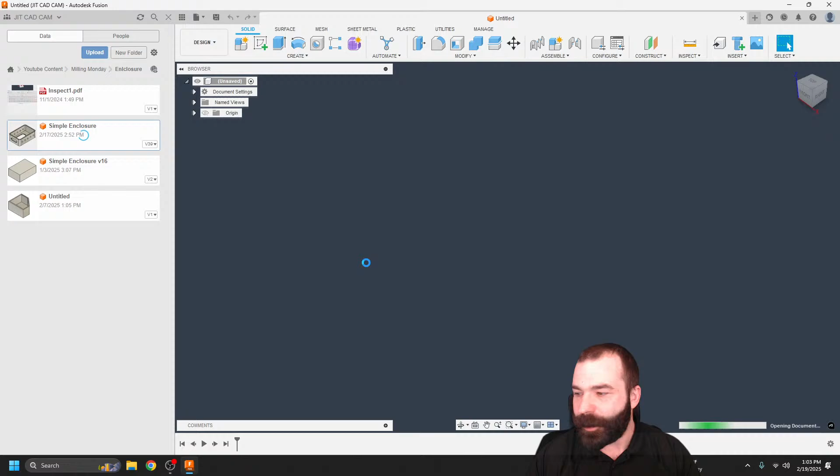Now, some of you already have played around with drawings as a whole. I am going to start with the basics by just grabbing a simple part here. And this is just nothing more than an individual part. And we're going to run through a couple of different workflows with drawings. I don't know how long this is going to take today. This might actually end up as quite a long video. But we're going to start out in the design workspace.

Now, the first step I would recommend is that you create your own drawing template, and I'm going to walk you through that at a very high level. Bear with me. It's been a while since I've had to do this, so a lot of things have changed over time, but we're going to go ahead and say new drawing template. We're going to set up our page size. In this case, I like the idea of a 8.5 by 11 standard printer paper. We're going to go landscape layout. Of course, if you believe in the non-bald eagle units, you could set that up here as well. So we're going to go ahead and hit OK.

And now, I've just noticed out of the corner of my eye, I need to figure out my lighting because the white coming off my screen is making me look way worse. I promise, guys, I don't look this bad. Maybe I can very quickly here throw on my tan filter. Let's see here. Am I a little better there? I'm a little more golden now.

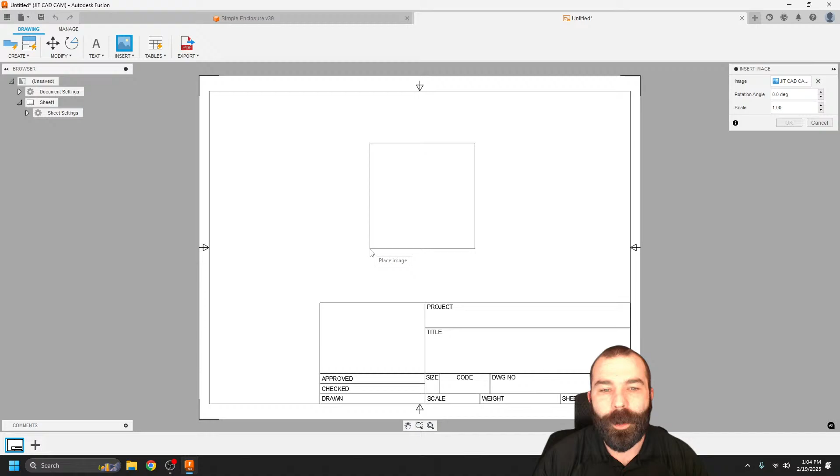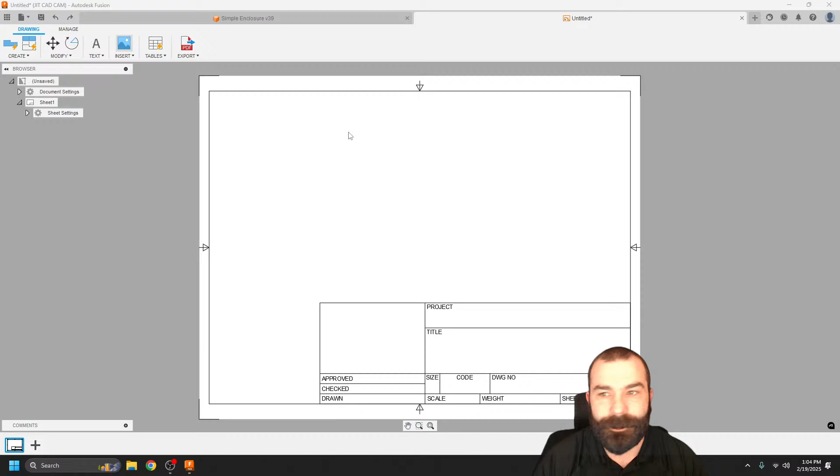There we go. So the idea here is we are not only just building the template. If you guys wanted to insert something like, in this case, I've actually already pulled it in, my logo for JIT CAD CAM, right? So if I wanted to put my own actual image in here, as you guys can see, I've inserted that image into the area. I'm going to actually back that up, and do that one more time here, because we need to get it a little closer to where I want it.

But the other side of this is we're going to have to scale this down in my case. So let's just go 0.6. Oh, still not quite enough. 0.5. Now, keep in mind the resolution size.

This is a 500 by 500 image. Things of that nature, you're going to have to control on your end, right? I just brought this in as a PNG file, nothing fancy. So a few other things you could always add in.

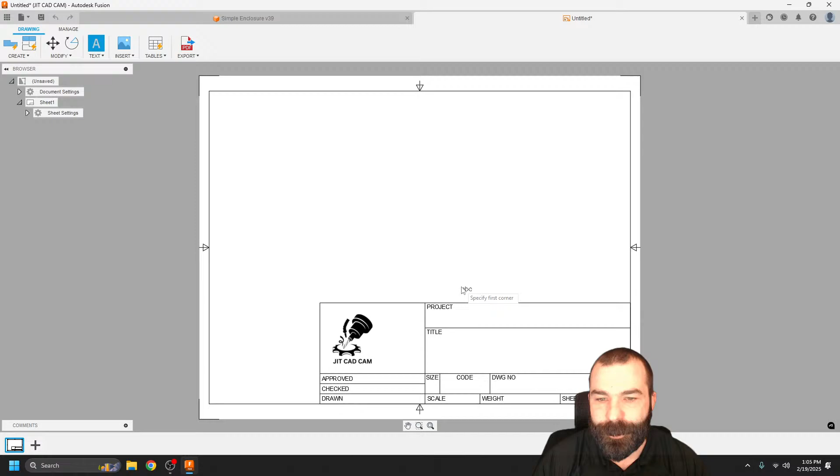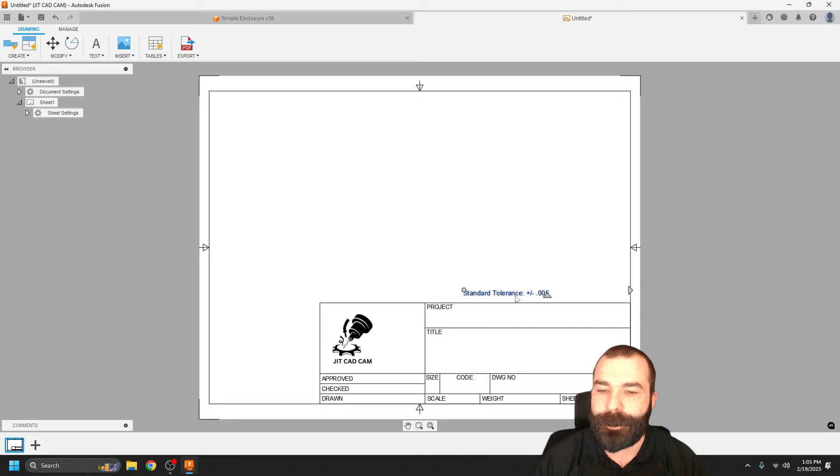Let's say, for example, you like the idea of, I always want to put in a standard tolerance. And in this case, we're just going to say it's usually plus or minus 5. Now, this is where I tell most people to skip any dimension on my part that's plus or minus 5, or maybe your standard dimension is plus or minus 3. And again, what we're doing is we're building out our template to use for later items, right?

So as you can see here, we've added an image. We can go ahead and edit this entire project area and your title block. Again, I just double clicked on it. We could obviously set anything and everything. We can even change out what's automatically being pulled. There's an entire manual that I forgot to put in the link of this video. I'll add it after the video on how to configure this and set it up.

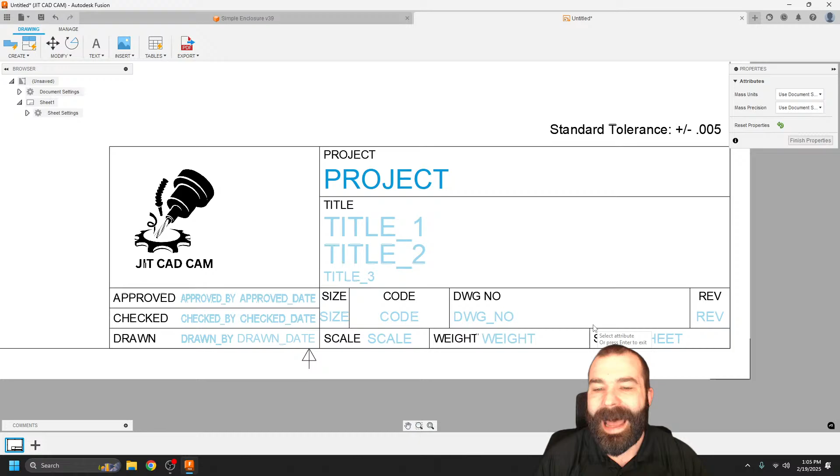So again, what we're next going to do is I am going to insert a table in this case. And what that table is going to be is basically the breakdown. And this is an automated table. And what this is going to do is automatically place our information as we need it. Again, you can go through, you can define this kind of like an Excel spreadsheet, pretty straightforward.

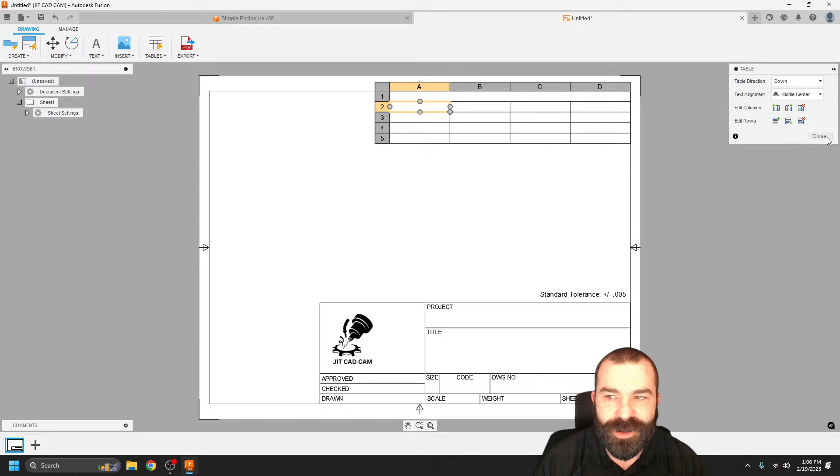Next, we can actually add our placeholders. So I can add a base placeholder. Now, what this is going to be at first is, again, with that common workflow, we're setting our defaults in our template level, right? So as you guys can see, I'm going to do the entire assembly. From that assembly, I would like that to be a shaded part. I can scale it automatically, or I can force my own scale.

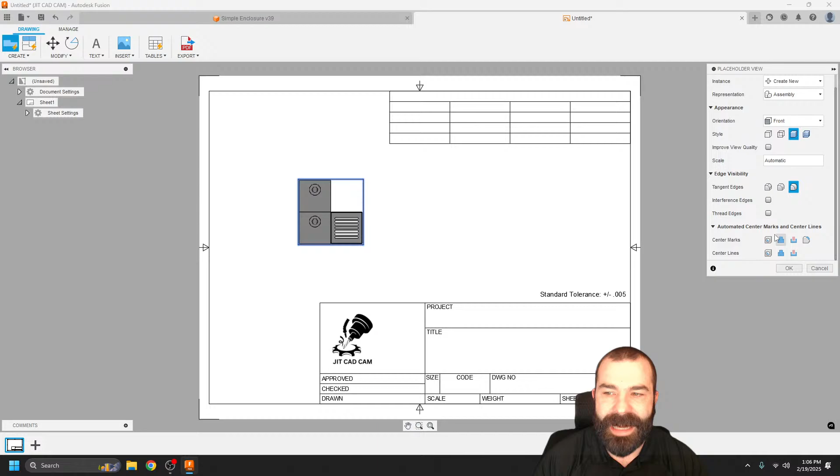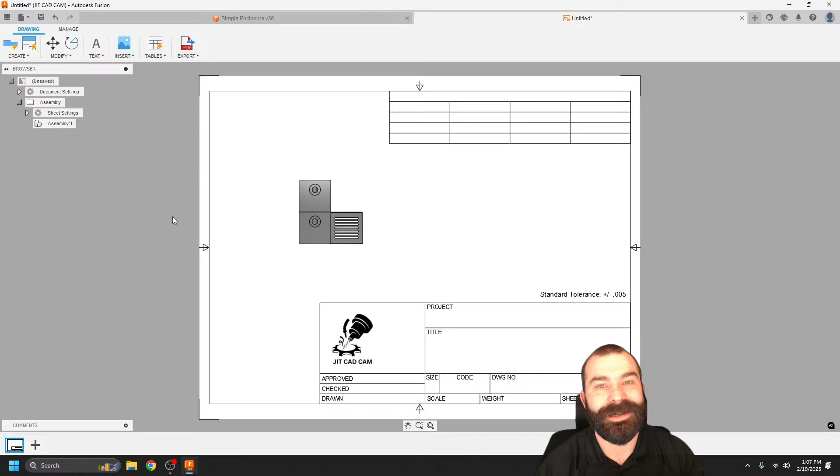Again, pretty common. We're not actually going to add anything automatically to any of our parts, because the idea is this is kind of like a title sheet or a cover letter to my drawing. So it's, again, a big image of my part. And then from there, we have our built out spreadsheet, which our data should come through automatically. Again, guys, it's been a hot minute since I've had to work deeply on this, but we're going to go ahead and add a second page. And you're going to see why when we get into certain things later.

Again, I'm going to put my placeholder. In this case, this might be the actual individual component. Now, if you haven't seen any of my content, this is where you guys are going to see a component is the Bible of everything. And that's why this is so important. Again, this is just going to be a shade. Actually, let's just do a visible edges only. And we are going to center mark, center line holes.

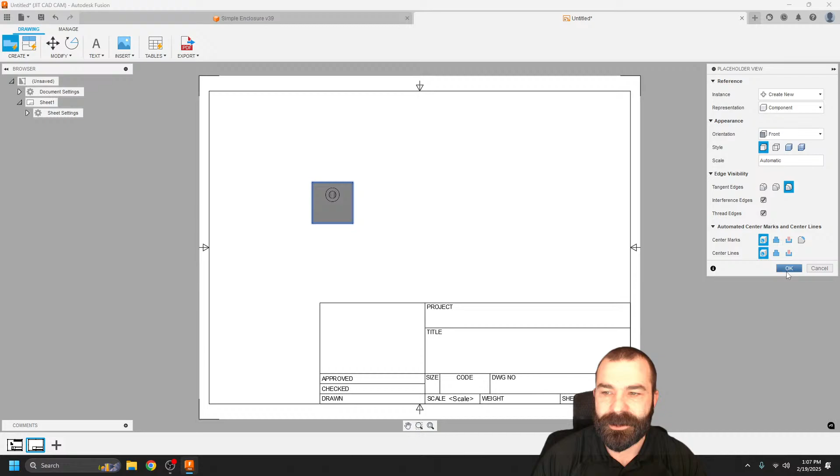And what you're going to see now is if I wanted to go ahead and click and drag to the right, again, I'm placing my different views of my part. And let's go ahead and get that up there. We're going to hit the green arrow. And now you can see it's automatically going to place my part as need be. Again, keep in mind, we went ahead and did our center marks on holes. We could turn off those center marks at any time. And you guys are seeing that update in real time with me toggling it on and off. Same thing happens with additional features as always.

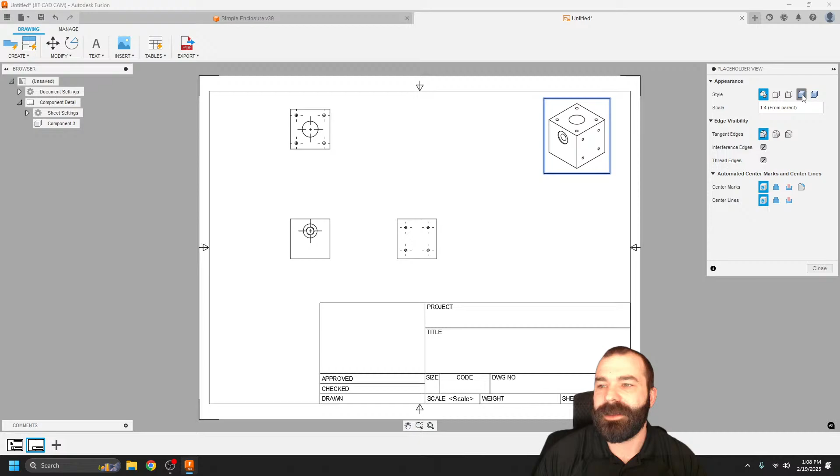Now, I prefer to make my part in the corner a lovely color shaded part. Again, I can individually change each item, but they're all being driven off more or less what is the parent product inside of the software, right?

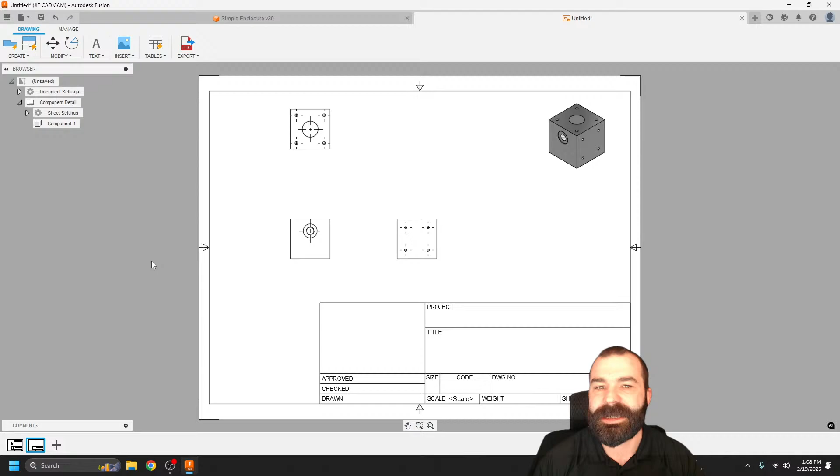Again, what I'm doing is, for those of you that have just jumped in, we're just building a template right now. I haven't even used a part. We don't need to make 100 placed parts, right? This is my default placement for each individual component. Obviously, if I wanted to go in and I had sheet metal parts, again, we would place one based on a folded component.

Maybe you want to do one based off of a flat component. Again, as you guys are seeing me do here, I'm just roughly placing these as placeholders for anything we're going to do after the fact. I don't think I have any sheet metal parts, but we'll go ahead and build a few out just in case. So now we have a couple of things placed.

Title block customization is relatively simple, but we're going to go ahead and save this. Now this is where I'm going to call this the JitCadCam title block. Or actually, we'll just call it drawing.

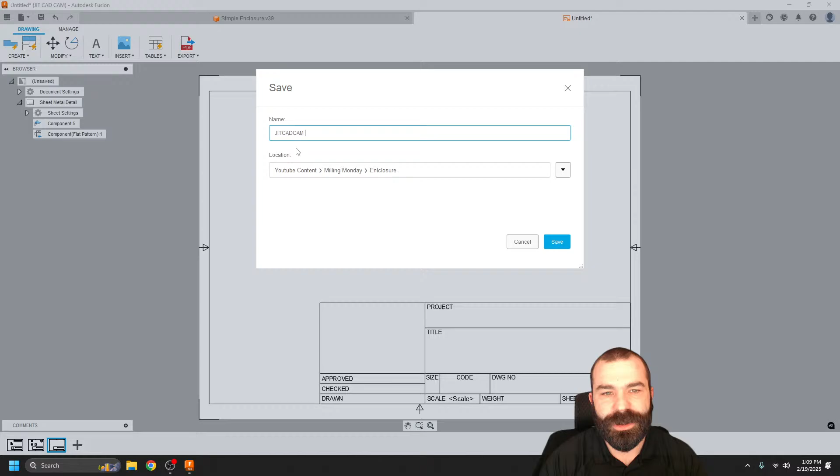So now that we've officially created our template drawing, Ryan, great to see you. I saw your comment earlier, buddy, about being ecstatic about this one.

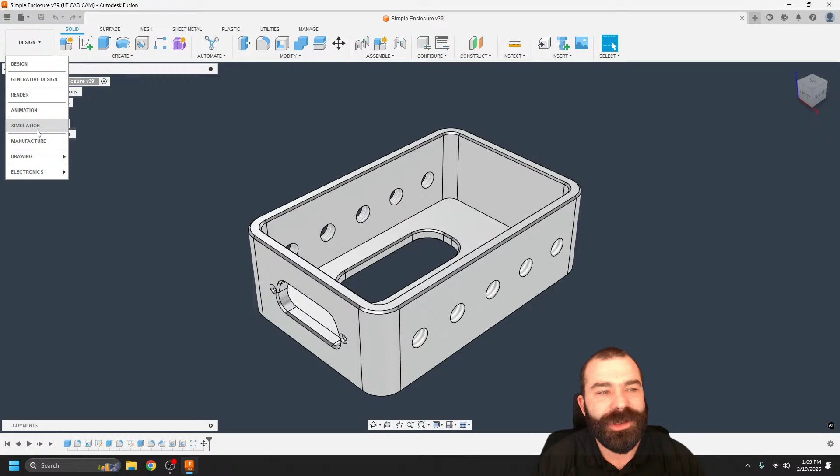The reason why building the template is so important, and that was a quick crash course. As you guys know, these videos are aimed to give you just enough to be dangerous to go play with this. Now if I actually wanted to create a drawing from this design, you'll notice we have a lot of different options for how we want to pick our stuff. I'm going to do this manually the first time through, and the second time we're going to do it automatically. This is the only exception to the rule why I tell people on my drawings: I machine from the model, the drawing comes from the model. The only information I care about on this model is really pertinent information like hole spec data and any feature that's critical, and you guys will see this.

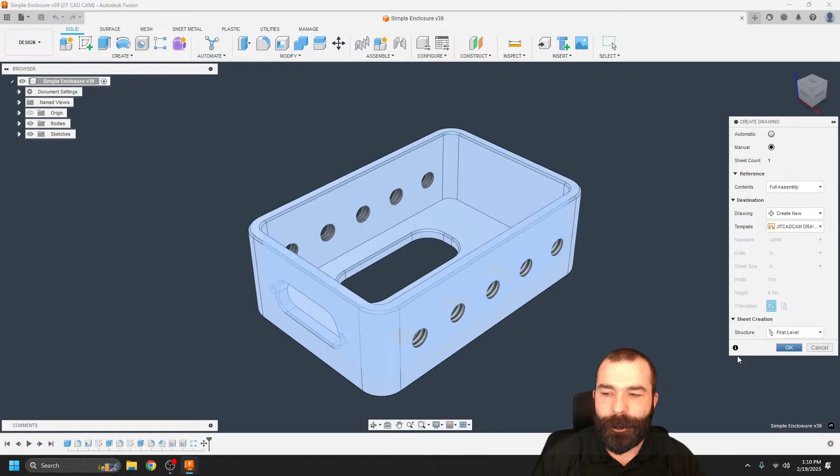So what we're going to do is go down and say from our template file. You'll notice it's locked us out on everything. Again, we have the ability to say first level only, all levels. This is not an assembly file, this is only a part file. So we're only going to do one part the first time through, and then we're going to pull up an assembly and have a little bit more fun with it.

But as we talked about, remember when we created our template, we created several different views down here, or several different sheets. The thing is, since it's only one component, it has placed that one component and automatically laid out all of my features here inside of Fusion.

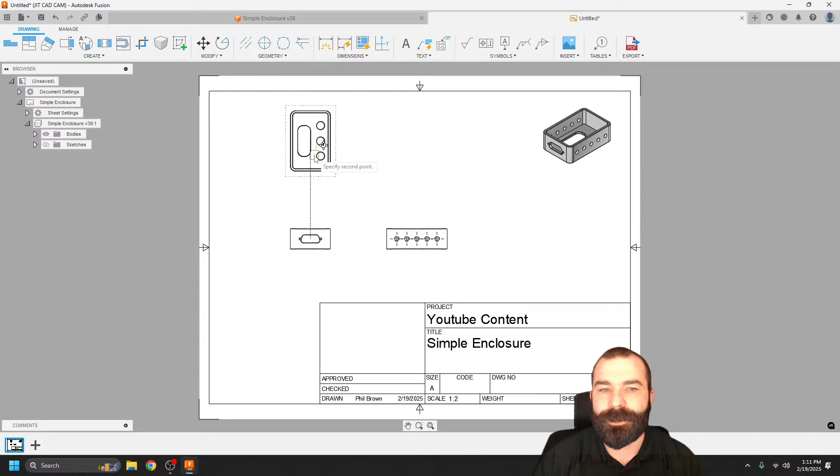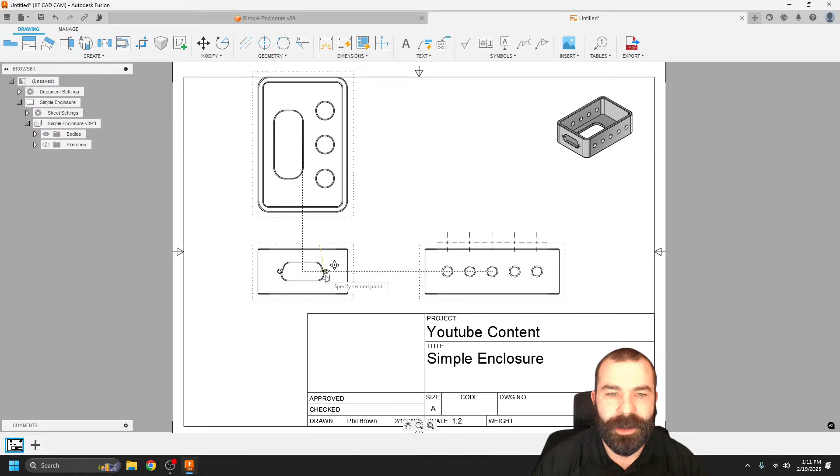So if I wanted to move it around, of course I have full range over moving things around. If I wanted to, for example, not have center marks on this, you can see we can go through and turn things on, turn things off. Maybe I want to change my scale for this particular part, and I'll change my scale up here at the top, so 1 out of 2, nice and pretty. Again, we could drag things apart. I can modify the drawing even after the template has done its thing. So this is super handy at the end of the day.

Now that we've done our drawing, this is where we can start to do a lot more things with this. The most basic thing a lot of people are going to want to do is dimension your drawing. So I'm going to skip all the way over here to the right, and what I'm going to aim for is we are going to start by setting up our dimensions.

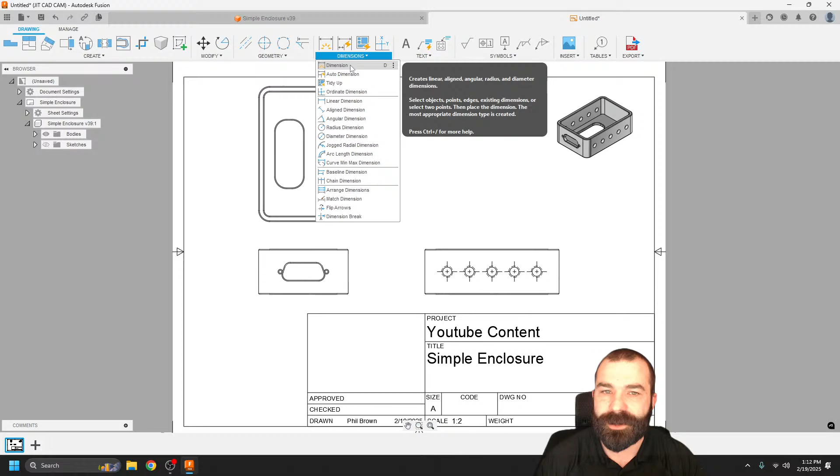Now you need to keep in mind there's dimensioning everything from point to point, here, there, and everywhere. If you're somebody that does a bit more GD&T critical stuff, we may want to create our datum and work from a datum. So what I could do is say ordinate dimension in this case, and let's say that's going to come right off this corner. Now I have my zero point. So maybe the next thing I want to measure inside of this part is this flat right here. I'm picking that flat and dragging it out to the side. Again, we can just continue on with this process.

But one thing you're going to notice is all of these have been placed in random positions, and they're not really aligned to each other, right?

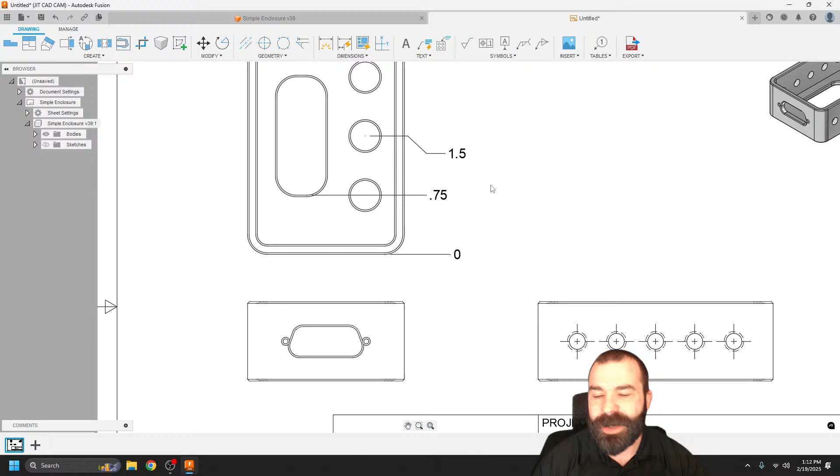Now there's a trick to this. Once I placed my first dimension, let's go ahead and delete these two and see if it still works. If I go back and use the Smart Dimension tool, I'm going to pick that first line. Then if I drag up and pick anything along the way, notice it's automatically aligning everything for me based on those reference points.

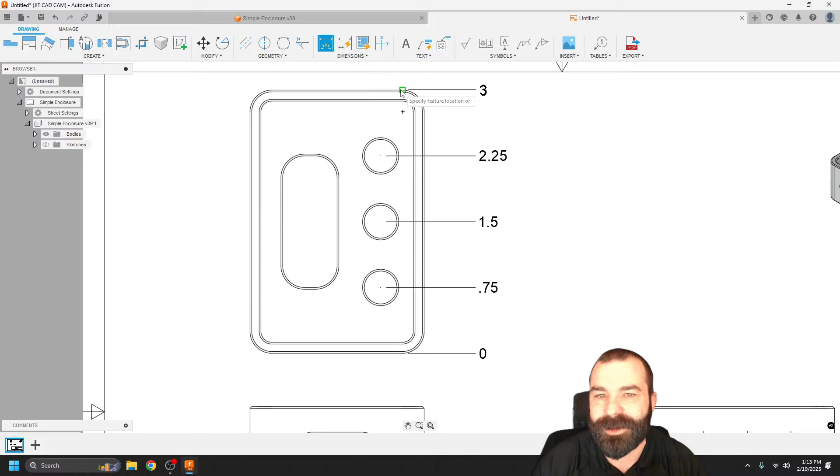So even when I get in here and start placing stuff in weirder areas, you still have complete range and functionality of placing things where you need on your drawing. Oh, I went ahead and hit delete there. Again, we just pull that first ordinate dimension. Let's just say we're going to place these 3 holes.

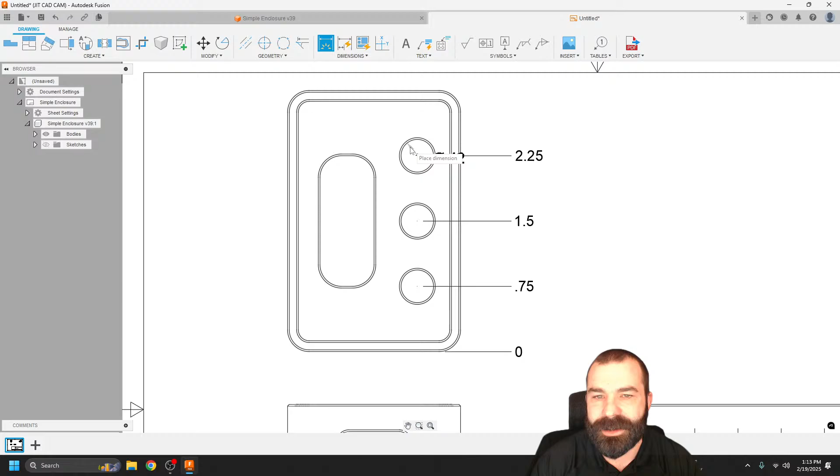Now the Smart Dimensioning tool is basically the easiest way to do anything inside the software. If I wanted to use the Dimension tool on this hole right here, I can go ahead and grab that edge, or if I misplaced it, I have the ability to delete and pick again, since we actually want that inner bore.

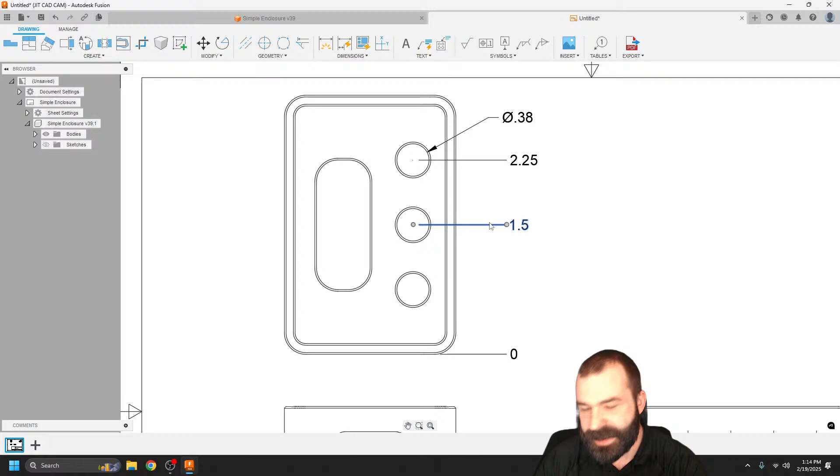Now, from this, if I needed - like I've said to people - this is how I dimension a part. If I'm going to make this part on the floor and my customer hasn't provided a drawing, this is my take on it. I would only care about a few things. One would be the outside dimensions of my part so I know my stock size to order for manufacturing.

And we're going to get these on here pretty quick. So there's my outside dimensions. And then lastly, we need a thickness.

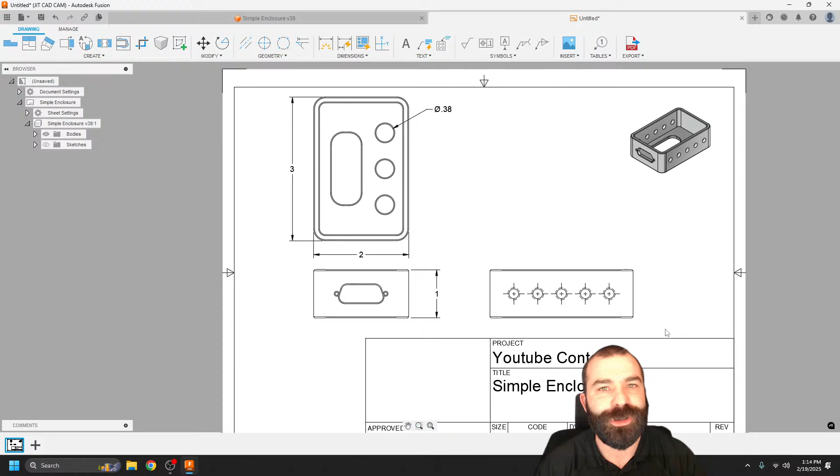Now, where you place these of course always comes down to you guys, but what I'm looking for is rough dimensions. Notice we didn't add text in our template to show us a ±5 or ±3 callout - that's a template controlled thing. We only did it on that cover sheet, not here at the individual component level.

But if I wanted this hole, for example, to have a specific tolerance, I could double click on that, and that allows me to decide how wild I want to get with it. So I want ±3 places, maybe go to 4 places if it's there, and maybe add all my trailing zeros. So even though this is only a 3/8 hole, we're going to call it out now as 4 decimal places.

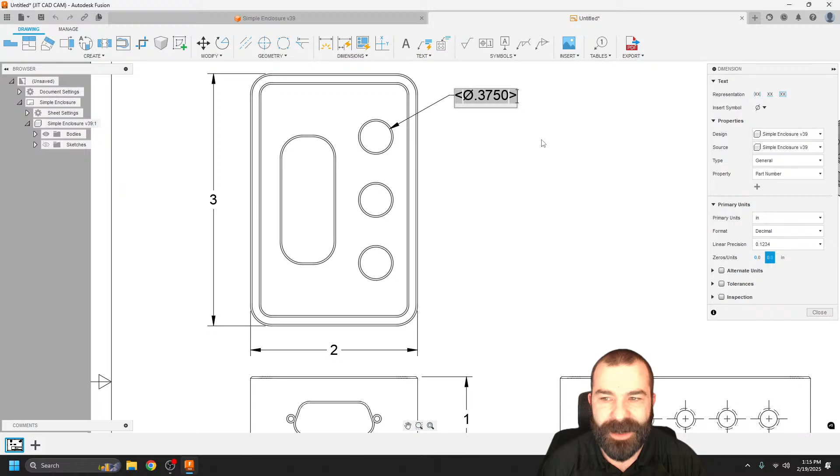I think a lot of you've seen on your drawing that it'll say 4 decimal places, there's ±5/10 or something like that. So if we were to put that down on our template when we created it, it would automatically be there for what we're doing.

Now if I want to get even fancier, I could throw in additional tolerancing - maybe we've all seen this, right? This is the stuff that drives me mad. A lot of us have talked about plus or minus from a number, but some of us have seen 2-dimensional tolerancing, greater or smaller than our part.

Nominally when we draw that hole, in this case we need to either be nominal size, and then I could do something like +10, -0 in this case. When you get in here and start to change the number of placeholders, my tolerancing is updating as well.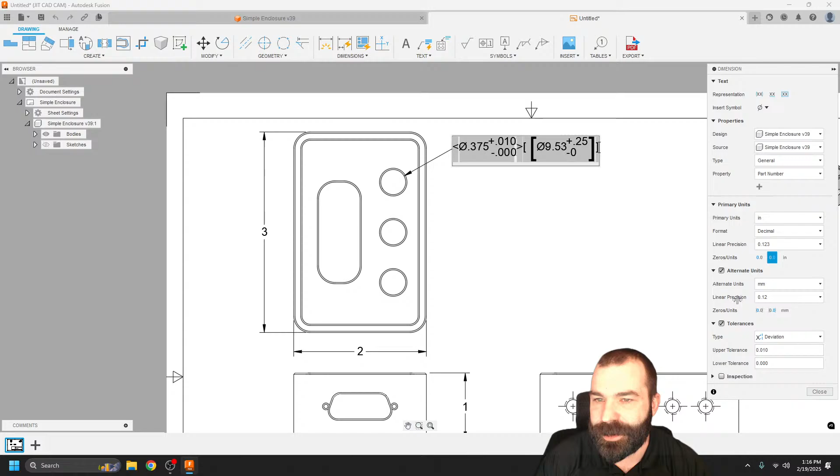So if you're one of those people that believe in using another increment altogether and you want to show both on your same file, maybe I also want to put millimeters into play, 3 decimal places for millimeters. We want to make sure we have our trailing zeros once again. Nothing right or wrong here - you guys have the ability to control each and every one of these.

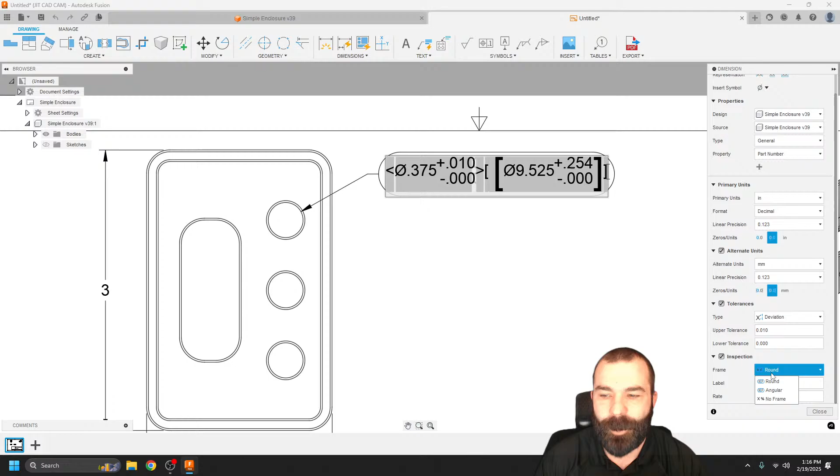And you can even set up things like inspection callouts as well. A lot of different things when you're basing your information on your drawing - this is important to me.

If I needed that to be a precise hole, I need to tell the operator that this is a precise hole, right? The whole game plan here is to communicate the data outside of, in my opinion, the standard to the drawing. So here we have a +10, -0 situation, here it is in millimeters. We've bubble outlined it in this case specifically so that the guy running the machine, or if you're going to place this in the parts bin, has the ability to see this.

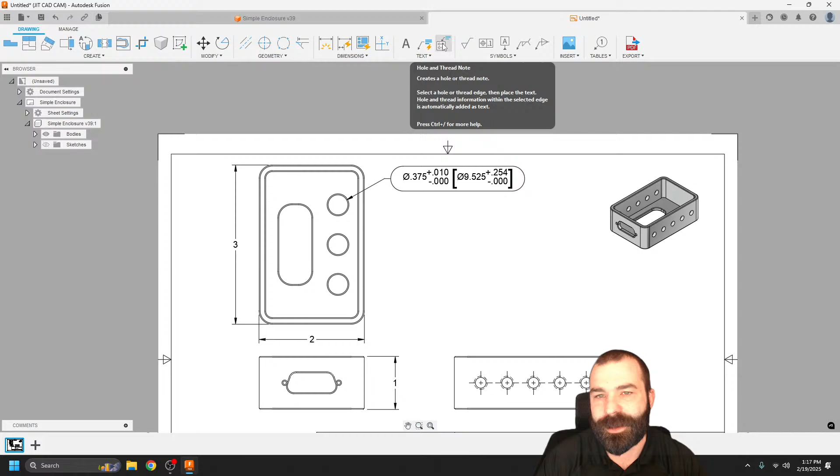Now, some of the other tools you'll start to see here, we can actually call out holes and thread notes. So if I click the automatic note function, and pick this hole here and drag outwards, you'll notice that because at my model level we've made these threaded holes, when I use that smart note feature, it's automatically called out all the information about my hole for me.

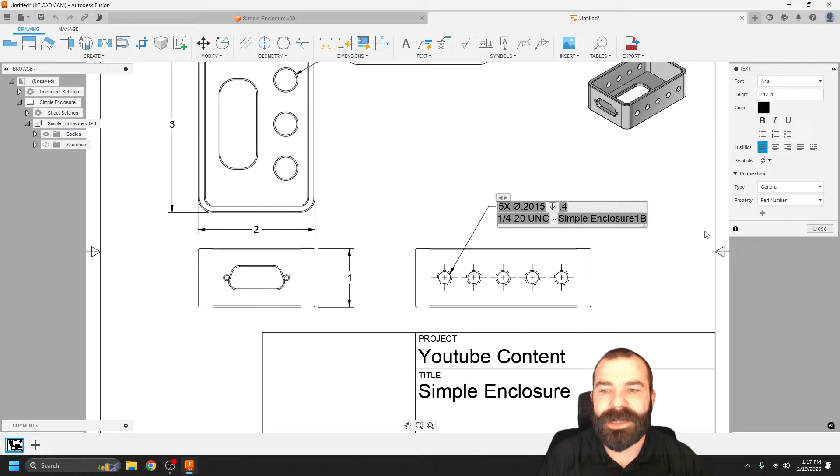So this is something super handy at the end of the day. You can go through and add anything and everything that you need. As you can see, we can actually insert the feature properties. Again, it's all up to you guys what you want to do to make this as great or as little as you want.

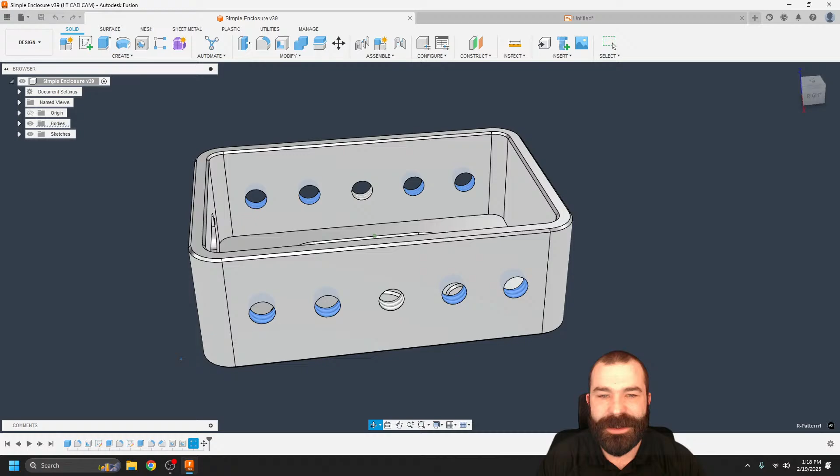Now, one thing to keep in mind, it's calling out 5 times on the one side of my part, but we do have 2 sides of this part. So depending on how your feature tree was built, I want to double check my feature tree here real quick. Looks like we did do some patterning here, but we created one hole here and one hole here, and then we've patterned everything out. So sometimes your feature tree makes all the difference when it comes down to doing your drawing side of things.

So it should be referencing 10, however it's not in this case because of how I created all of those holes. And as you guys will start to find out, this is why there's things like the hole tool, placing your holes based on point locations, to make your workflow much cleaner here in the drawings workspace.

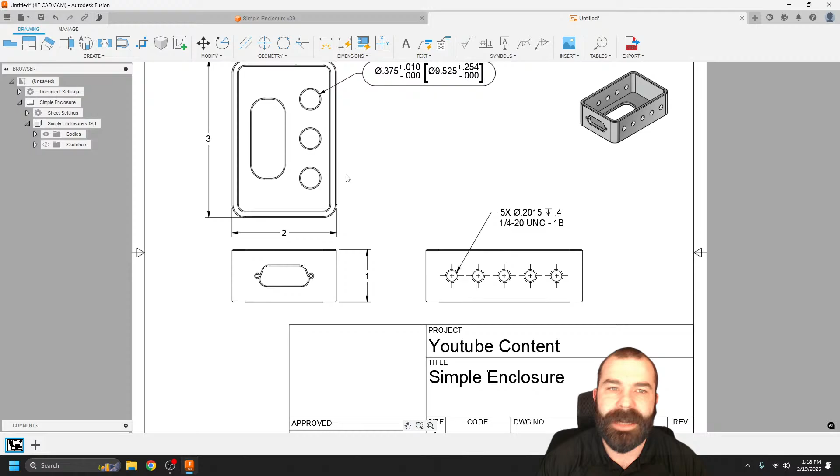So a few other things we might want to add in. You saw I went ahead and turned off things like hole centers. We can actually go back to our geometry side. We could drop a hole center mark based on a feature if you wanted to access that, kind of as a datum situation. If we went in and said let's create an ordinate dimension based on certain features, I could set that based on this line right here. Oh, we're getting a little laggy here.

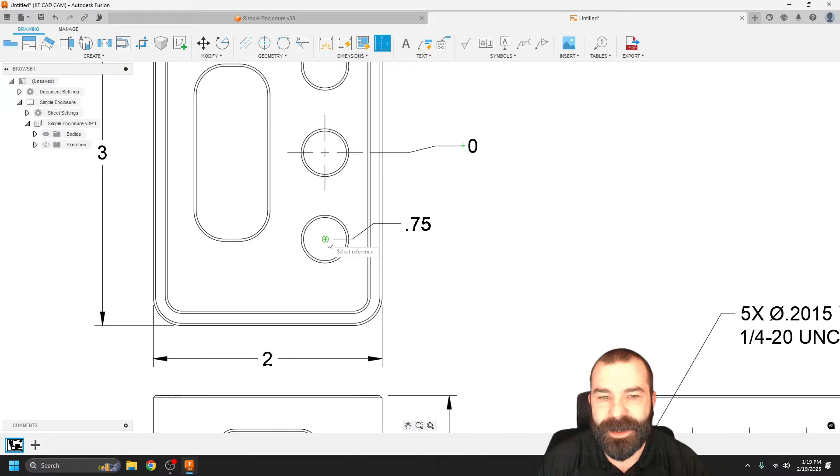So there is now my 0. And then if I go down here, and then if I go back up here, what you're noticing again is we're setting something almost like a datum and working off of that datum.

So a cool other couple of features I think a lot of people don't realize is the ability to actually insert tables. We can use an automated table, and what this automated table is going to allow me to do is, one, clutter up my drawing a ton. But again, we can drag and drop stuff anywhere we need it.

So let's go ahead and get this out of the way as well. It's going to be a little difficult today, so we might actually just delete this so you guys... oh, nope, we got to grab the little node in the middle. We're going to get this. Let's just put it down here.

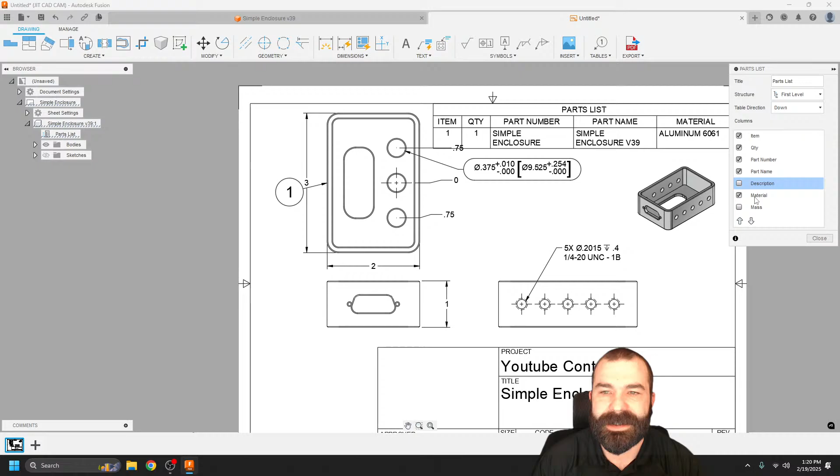There we go. Now, cool things you can do here: calling out your part numbers, part names, your material itself. Autodesk has made this very easy to add just about any information that you want against this part, so that it is easier for your operators or whoever's going to use this to control it, right? So we're going to go ahead and get this dimension out of the way so I don't lose my mind. Everything's starting to get cluttered here, so we may need to make a late decision about, hey, you know what, I need this to be smaller.

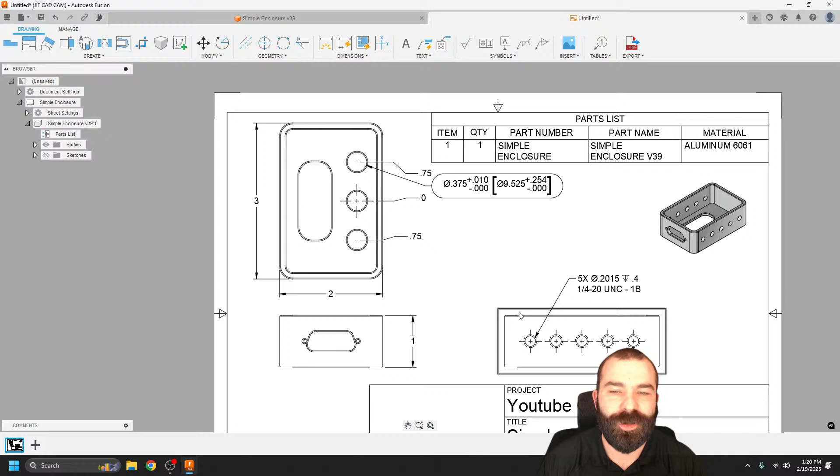I need this to be bigger. So again, you have your bubble callouts. We've called that out based on creating an actual title block. Again, very easy to do. So the next thing I'm going to do is I'm actually going to scale this down because we're going to look at doing a few other things here.

So what I'm going to do now is, again, we're going to move this over, still having to move our parent part in order to get our child parts to move around. But this is where, just like everything else in Fusion, when we first came in here, I've kind of jumped over the workflow where we got straight to dimensioning, because most people want to know, how do I just dimension out my part? How do I add the notes for the hole features for my guys, things like that.

But normally what we want to do is we usually want to create your base view. We've already placed our base view and our projected views. So if I wanted to add another projected view at any time, again, we can grab that projected view off any one of our placed areas. Again, you're seeing an isometric view because I went downwards at kind of like that 7, 8 o'clock position, right? Now with that, again, it's just a projected view from the view I pulled, isometric bottom of my part.

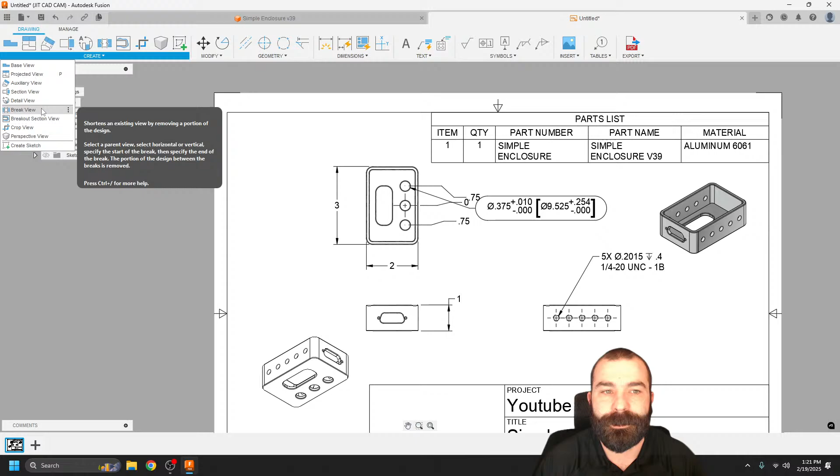We can do a lot more things, as well as getting into your break view type stuff. If you have a very long part, we can actually shrink it down. So if you're running shafts, break view will allow you to break that drawing and scoot it much closer together. A lot of people love the section view as well if you're doing turning parts.

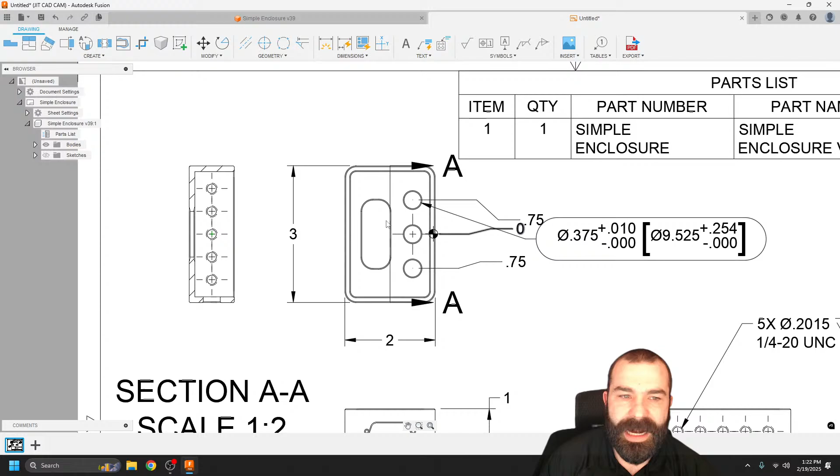Now, section view is always fun because, as you're going to see here, I said section view based on this enclosure. And what I'm doing is I'm placing my first point, my second point. And now what that allows me to do is give me a section view of my part. Again, visible edges only. And as you can see, we're now looking at a hashed profile of the inside cavity of our electronics enclosure. Again, a lot of this stuff is going to snap to locations the same as your sketching does. So as you saw there with that section view, I was able to snap directly to points on my part. Again, I could drag this up now at any time.

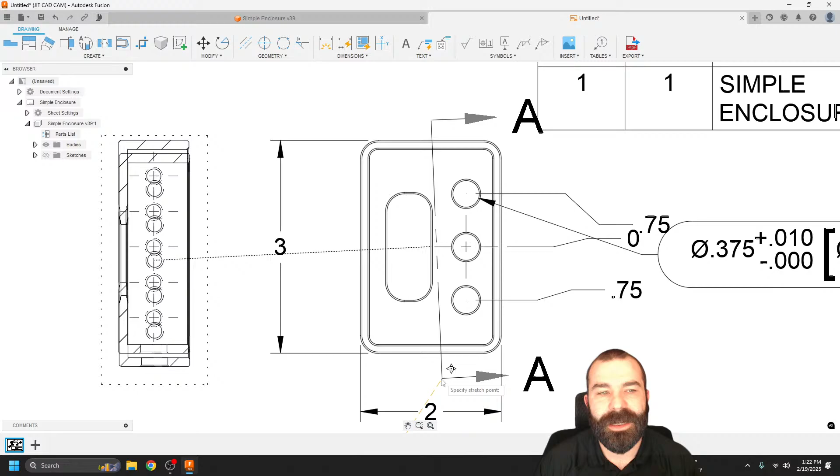We could also rearrange these to get them a little closer. Depending on where you put them will also change your section view. As you guys can see, if we're not at the true 12 o'clock position, 9 o'clock position, everything and anything is going to come through automatically.

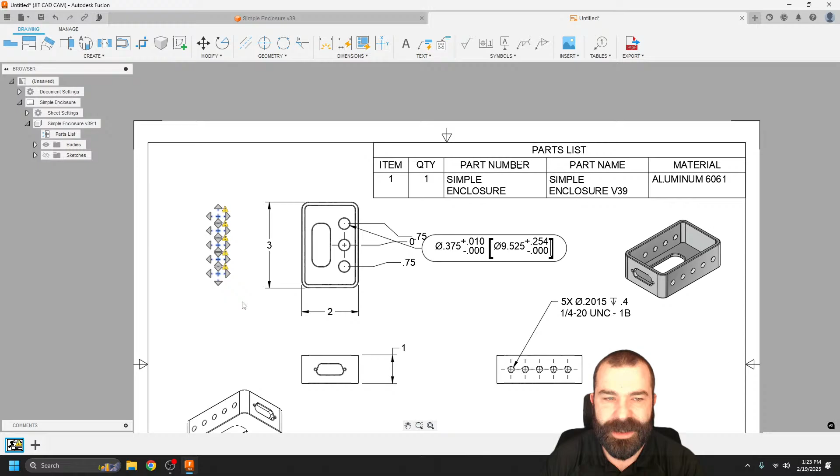So again, as you can see, I could do a lot in a manual process, but now for my guys on the floor or whoever's going to run this part, if I was still using a very traditional manual workflow, as you guys are seeing here, I would only give them the bare minimum data that they really need to be able to utilize and create this part, right? As you saw, we called out our critical hole dimension. We really don't need any of this other stuff. My shipping and ordering guy needs rough stock size for ordering material. And we kind of have that all placed here, right? We also have our hole tolerance callout.

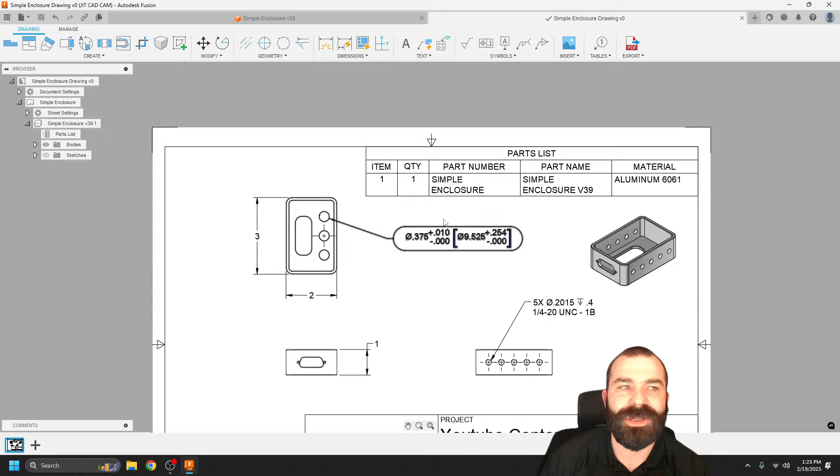So I could save this drawing. The nice thing about that is it's going to auto place it inside of our project area. And as you guys may or may not know, and you may have seen this, if I need to actually take this simple enclosure and reuse it, if I go in and I say copy this, it's going to give me the option to include my drawing with it.

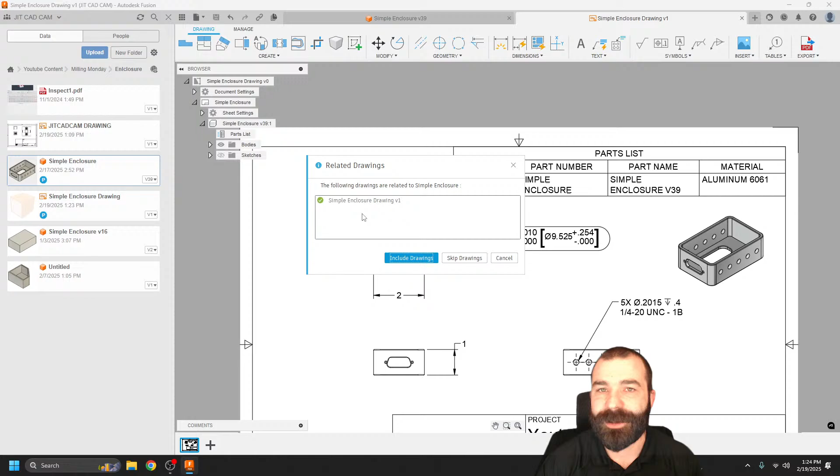Why is that important? Well, if you were actually going to create a drawing for a jig or a fixture or a vise setup for your machine, the value here is, if you're using parameters or the actual configurations page, as a lot of people are doing now, we can actually have that drawing also generated to go with it every time you copy it over to your part file for manufacturing. So again, the nice thing is because the drawing is tied to the model, at any time if this model was to change, let's get back to my base features.

You guys are going to see me completely break this thing probably. And we're going to go 3x6. Again, made that part much larger. Maybe we're going to increase our pattern out a little bit further.

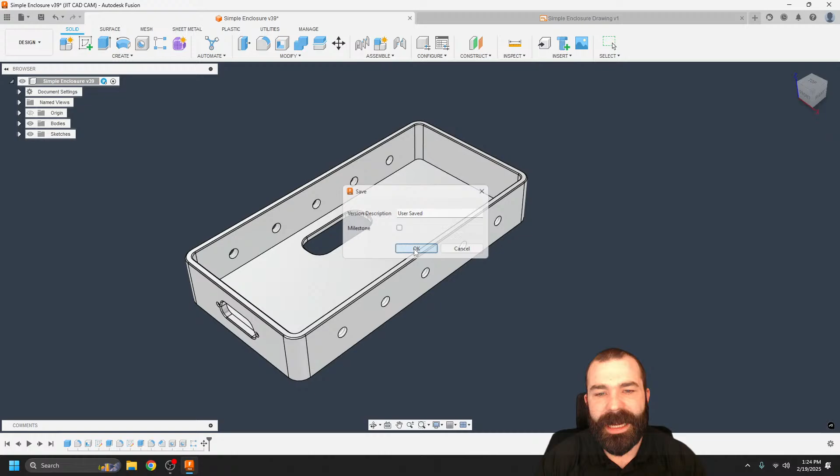As soon as I hit save here, in the typical fashion of things being linked inside of Fusion, my drawing now tells me, hey, my simple enclosure needs to be updated. So I'm going to go ahead and hit that update button. It brought in that new size. And you guys see, of course, my dimensions have all updated accordingly. Anything that I had placed or called out.

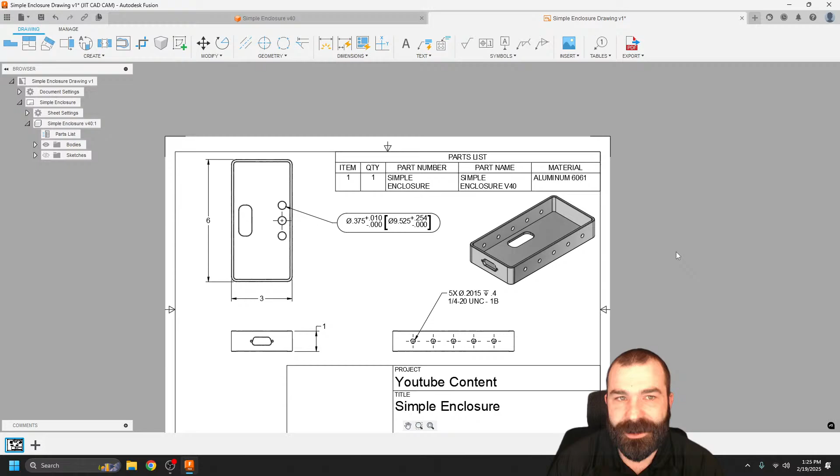Now, I do need to do a little rearranging to get it reorganized in here, but let's go ahead and shift gears here real quick. Let's go back, and I'm going to save this just so I have it, but this time let's create our drawing from the side of doing things with the automatic drawing dimensioning system. So what we're going to do again is we're going to use my same exact template. We're going to go ahead and hit OK, and we're going to let Fusion do its thing.

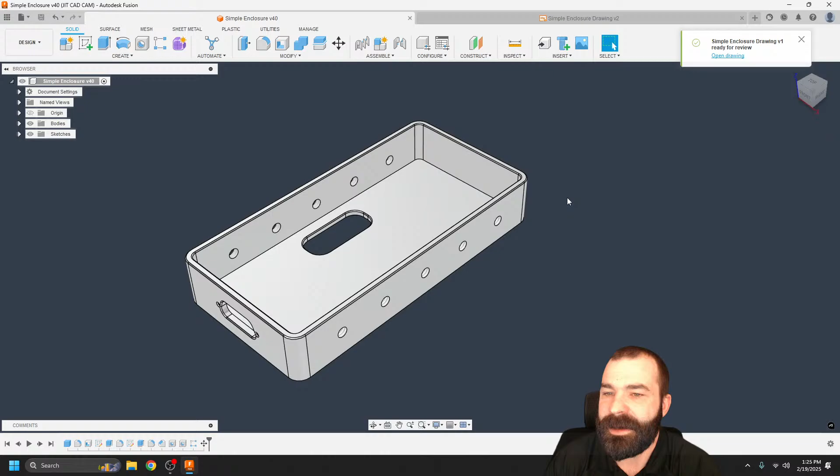So it actually started itself for creating that enclosure drawing. And what you're seeing now is it's very snappy, given this is a pretty simple thing that we've done. So we're going to go ahead and open this up and take a look at what it's done for us. Now, if you've ever used anything from simulation to generative design inside of Autodesk, again, my template has placed my parts, so I may need to move them around. But first, I need to actually edit the auto dimensioning.

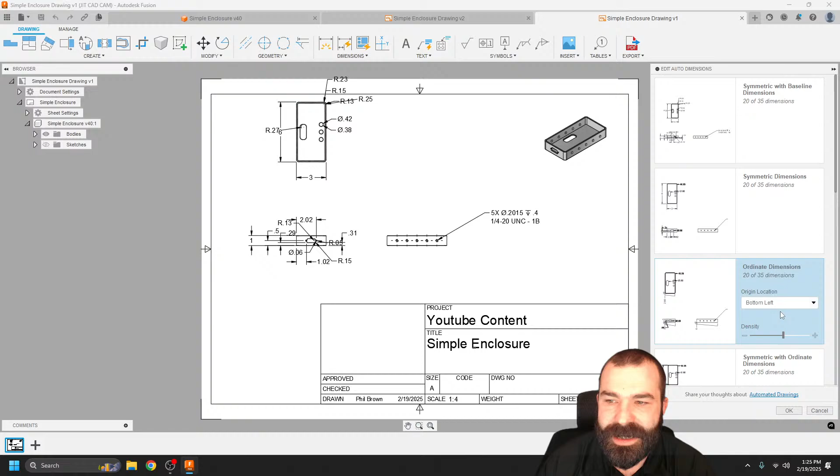So as you guys can see, there's a lot of different ways for you to call this out. Again, we can simply jump from the baseline dimension to ordinate dimension. I can increase the density. I can decrease it. Again, what that allows you to do is how many drawing dimensions do you really want to add here, right? Do I want to call out every single little thing in every single area? You guys are seeing all of my fillets are even being called out on this part.

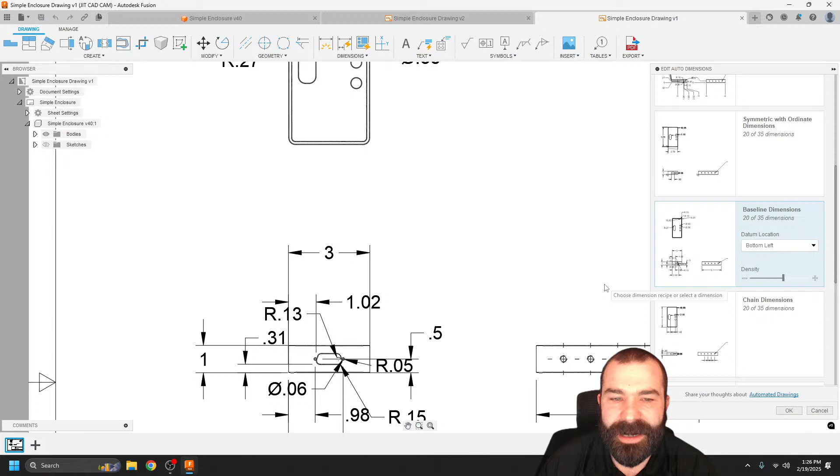So again, this is super neat and super quick for the drawing side of things to efficiently place anything and everything that you guys have, again, for the ability of manufacturing, right? That's the end goal each and every time. Now that we've placed everything, of course, we can go back, we can move things around, get them where we want them, move our dimensioning to wherever we need to call it out and place it, right?

So a few things that are still missing, I might have to go back and add my critical dimensioning. Again, we can actually change our default settings inside of Fusion 360 as we're going as well. So we have everything from a sheet setting, our title block can be swapped out, our fonts, again, full customization inside of Fusion.

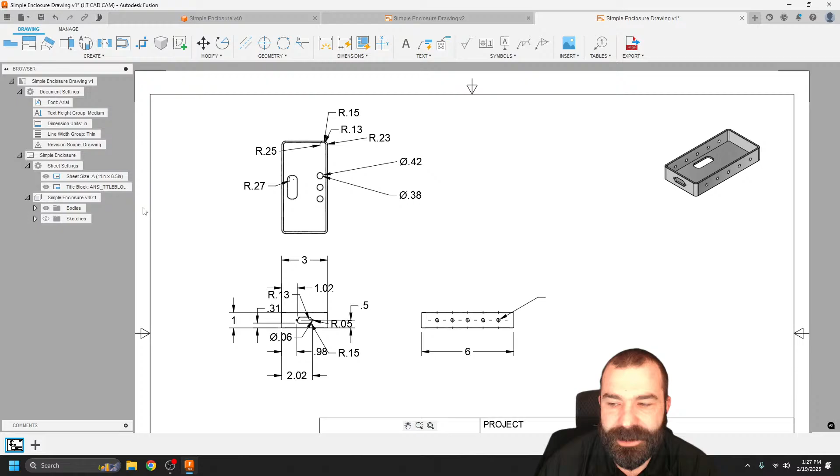So now to see our template work a little bit better here, I'm going to go ahead and pivot. We're going to go ahead and open up a part that is actually more of an assembly, right? So if I was to take this Kurt vise, this is just a blank jig and fixture. I haven't placed a part or anything in here, but it is structured with components. And one additional thing, as you guys are seeing, is we also have the animation side of things.

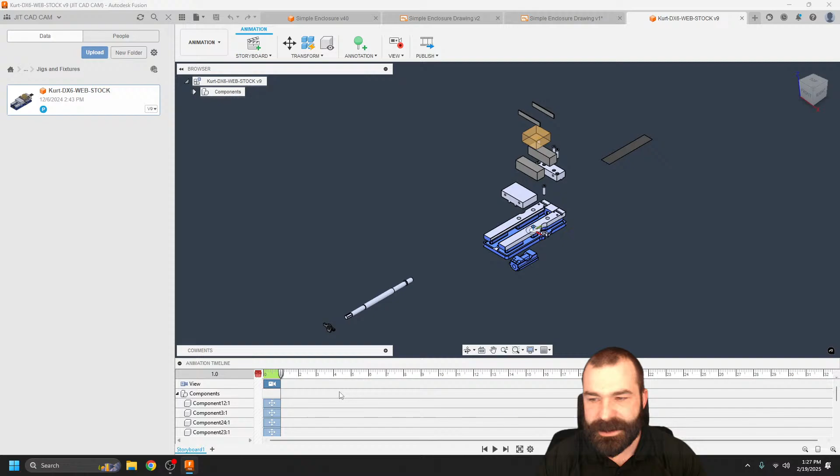I haven't made any videos on animation. There hasn't been a ton added to it. But if you guys wanted to, I'm going to show you how to do this real quick. Let's go ahead and delete everything out of here real fast. So if you wanted to go through and create an exploded view of something, right? So as you guys can see here, here is my timeline at the bottom.

I could go in and I could do automatic explode all levels. Of course, we got to pick our part first. And what that is going to do, again, is give us an exploded view of everything inside that file.

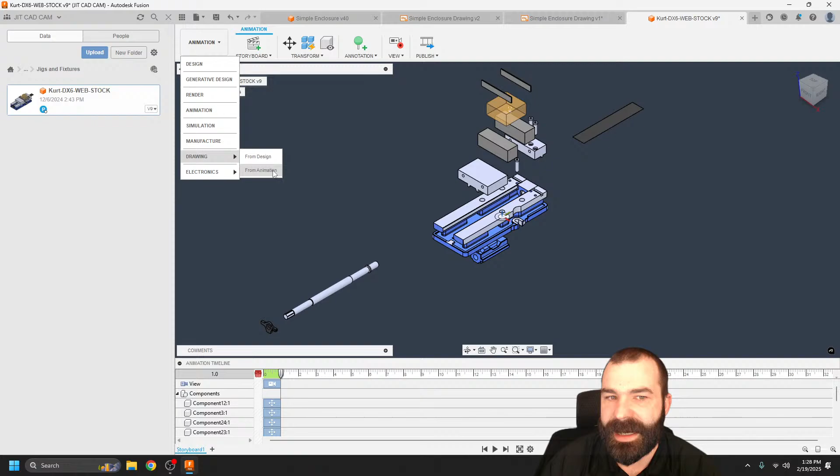Once you have that exploded view, of course, this is where when we go back with the idea of drawing from design or drawing from animation, we can create, again, a drawing based on whatever we have inside the software. Now, keep in mind, I don't have a template built at this point to be able to go off of the animation. So we're just going to say from scratch.

Again, we're going to go back to a letter placement. And what this is going to do, again, is allow me to place an exploded view of my part inside of the software, right? So the nice thing is that you can also do exploded views if you're somebody doing more of assembly work and things of that nature. Now, I believe there is a way, and it's been a while since I've had to do it, to place in an exploded view after the fact.

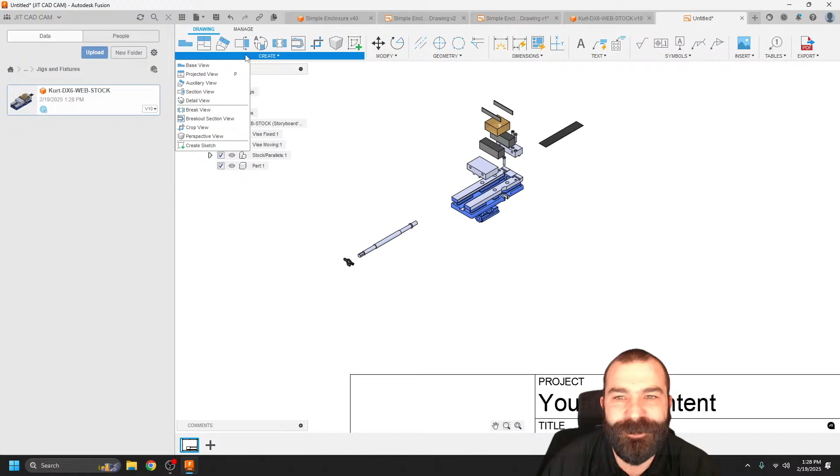Now, I can't remember where it was, and this is where I'm going to place my blame on old Monty out there, because he's been hogging all my time this morning with a ton of questions. But we have some neat stuff for you guys on Friday.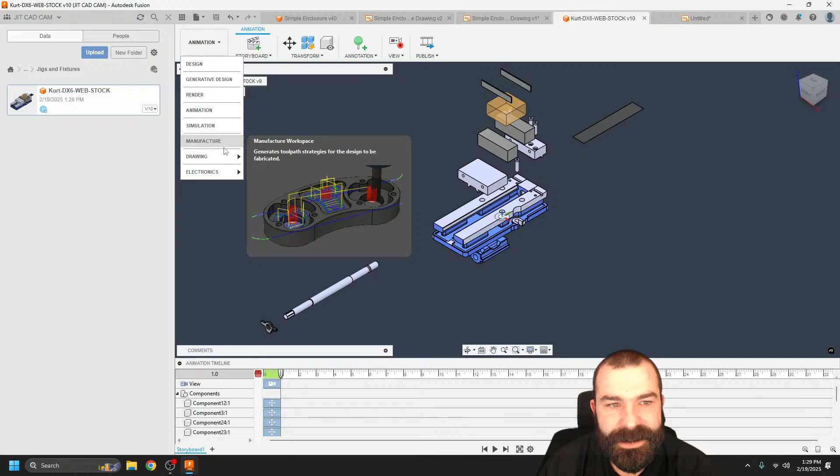But the idea is still the same, right? You're able to place that in there. You're able to use that exploded view, as you guys can see, for anything that you're doing. Now, we're going to go back. This time, we're going to do our drawing from a design. Let's get back here. We're going to jump from here back to design, drawing from design.

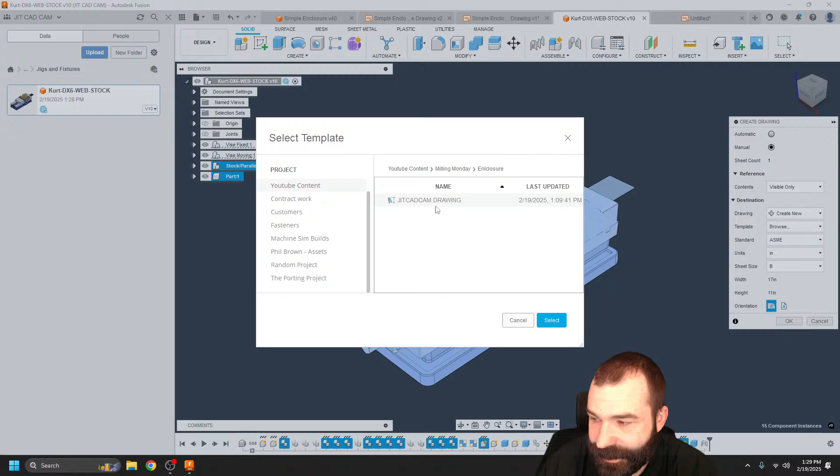Now, I believe I am actually mistaken on this. We have to go back and find our template, which I'm pretty sure yours truly put in the other folder. So pro tip here, don't save your template with your part. Put your template over in another file folder location. So as you can see, based on my template, we're going to do manual placements, and then we're going to do all levels here.

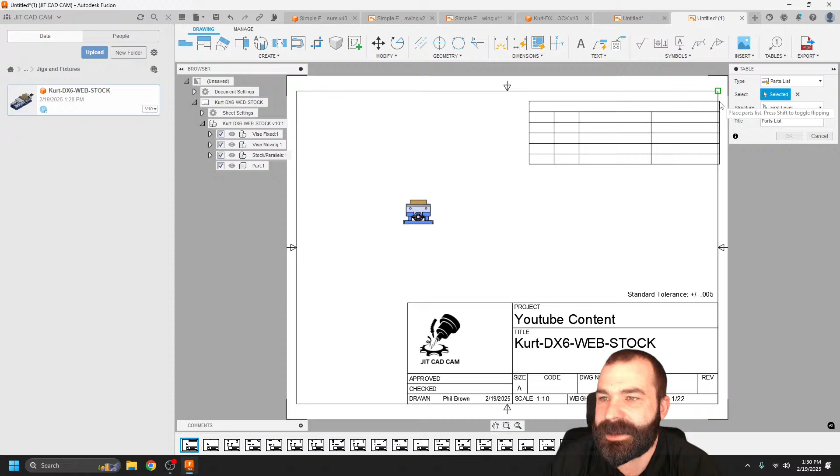So now you're going to see a bunch of sheets populating down here at the bottom of my screen. That is individually placing each component inside of this file. Now, I didn't get the automated template for my actual breakdown, but as you guys can see, we can go as if we did it before. We go in and insert our automatic table. That automatic table is now giving us our numbers and everything.

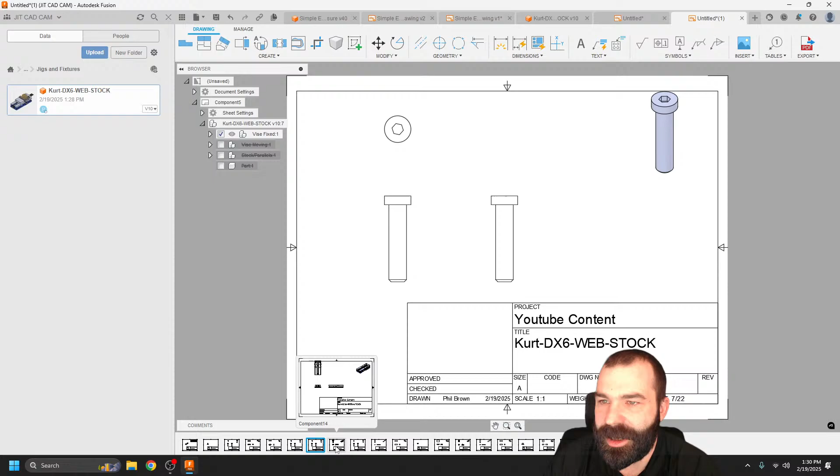Maybe we want to now change up and look at this in an isometric view. I always get the isometric views wrong, so bear with me, guys. There we go. So there is a picture of what we're going to work on. Getting into my next area, here's my placement for my first piece. Here's my bolts. Here's my jaws. Everything and anything as we run down through this part.

So the value of the template when you're going to go out and actually design and make stuff is night and day difference, as you can see, when you have your parts placed accordingly and how it's going to lay everything out. This is my stock size, right? So we're going to go ahead and throw in a table here. That table is going to tell us that is our stock. Of course, I want my guys to know the size of the stock in this case.

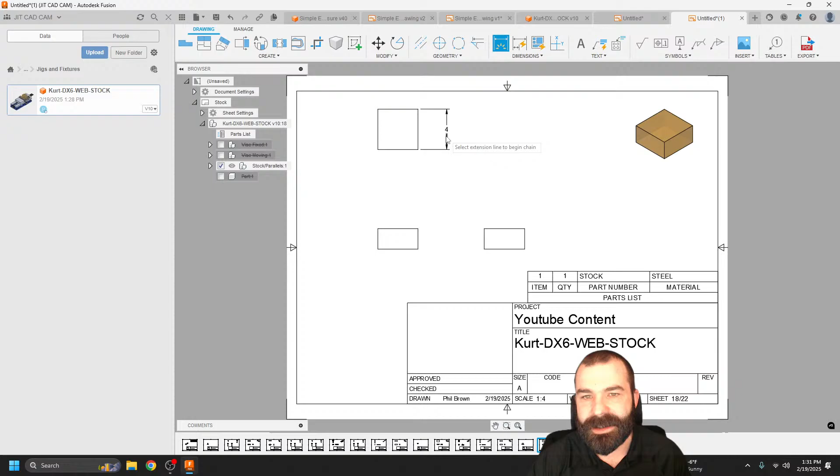So we're just going to go ahead and place those couple of dimensions that I want, and I can work with that in a lot of different ways, right? Everything and anything is going to be set up based on how you guys want to do it. When you're getting into this, you're going to start to see my standard tolerance comes out, because when we built that template, we said we always want to do basically an assembly or a sub-assembly version of that, right?

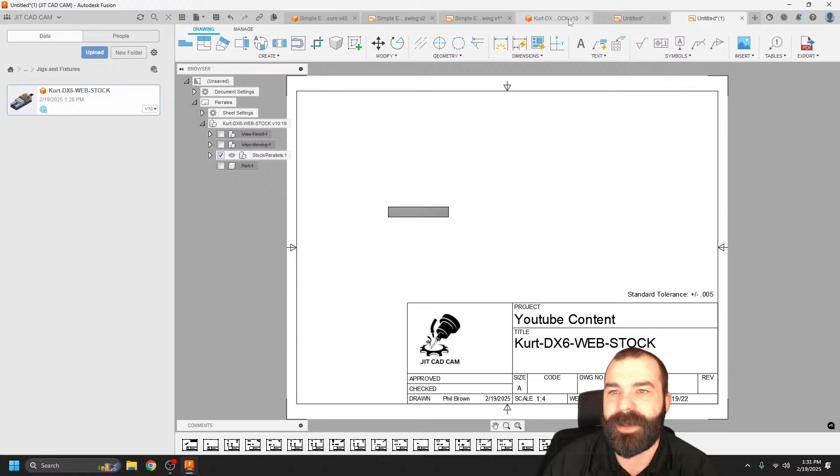So when you look at the way my component structure is, this is a component full of components. So this is actually an assembly, which is why I get what I call the Tetris block effect. A component with components inside of it, with components inside of components. So when you really get all the way down inside this file here, I have a set of parallels. And that set of parallels is a sub-assembly that rolls up to a main assembly in some type of fashion. And we're seeing that in the drawing area, right?

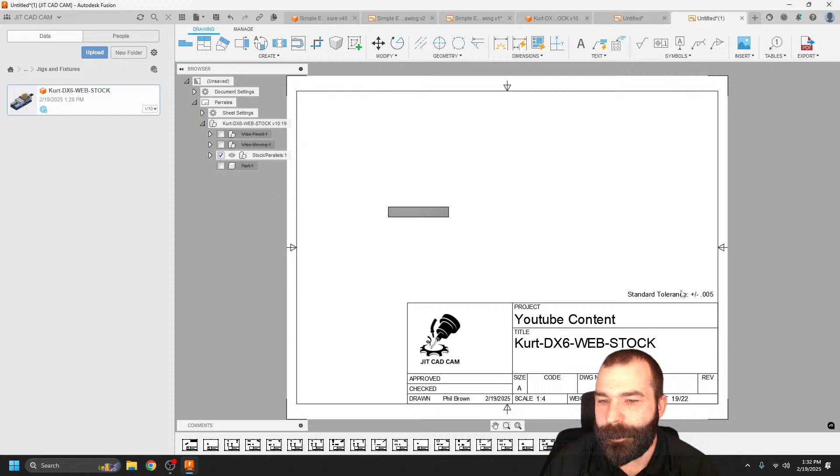So at one point, we get far enough down here. And what I'm going to do is flip this back into our isometric view. So you can see there's two parallels in this file.

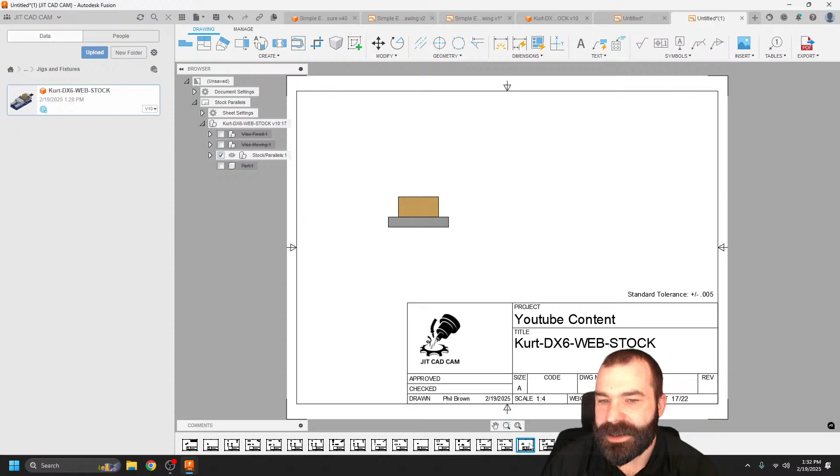If I go ahead and place my table here, as you're going to see, we have component 1 and component 2, a quantity of 1 each. Those are two parallels. That one level higher falls into an assembly. So again, here we're back up. So you have the complete assembly here. And again, we'll isometric this so you guys can see it.

So there's my stock sitting on the two parallels. Inside of my actual model design, we actually have a stock with parallels. So if I was to isolate this, you're seeing exactly this being transformed and laid out inside the software because of how we built that template, right? So again, there's my stock, there's the stock itself, there's the two parallels in a sub-assembly.

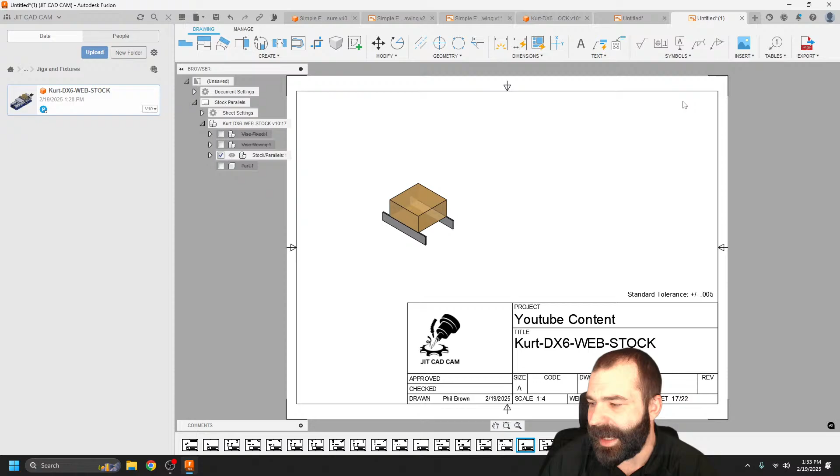Again, not the best of organization, but as you guys start to play around with this, you guys will notice that a lot of this becomes extremely user-friendly. And as you do one thing on one side, it of course affects everything on the other side. So here again, we're just going to say, let's place our table. There's my table. As you can see, here's one stock, here's two parallels.

And as you're seeing, we could actually take this even further. We're going to go all levels just by double clicking and editing that field. Again, you can see in the event I did a better job at this, we would have, of course, this organized. Both of our parallels would actually be a quantity of 2 versus a quantity of 1 each. This is just the way that it comes in. Nobody copy and pasted anything.

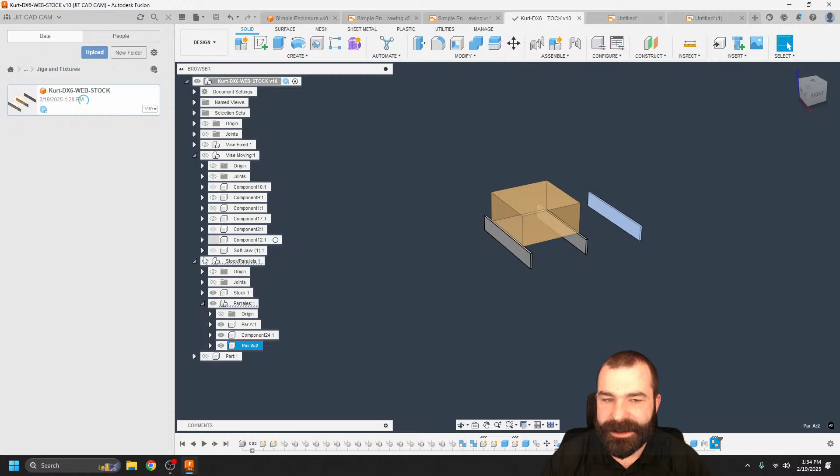If I was to go back, of course, now, and let's say we actually label this, I'm going to call it Par A. I'm going to copy, and then I'm going to paste that. And what we're going to do is we're just going to slide it over a little bit for visual confirmation. So now you have 1, you have 2. We hit save. It's all still inside of our sub-assembly, the way everything's rolling up.

And what you're going to notice is now when we come through and we bring that in, of course, with the latest update, now you're noticing Par A, or parallel A, has a quantity of 2, right? Because we have 2 of them in this actual build out of the software. So guys, how is this looking?

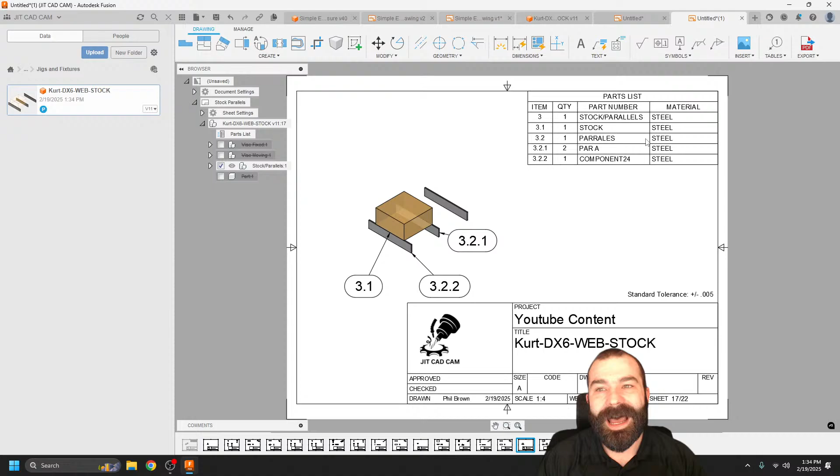Very quiet out there. It's funny because whenever I thought about making this video, I didn't think a lot of people would show up. However, there's quite a few of you, which leaves me quite impressed that, you know, drawing still has its place. I think so big time, as a lot of people are finding out. It is going to drive me nuts.

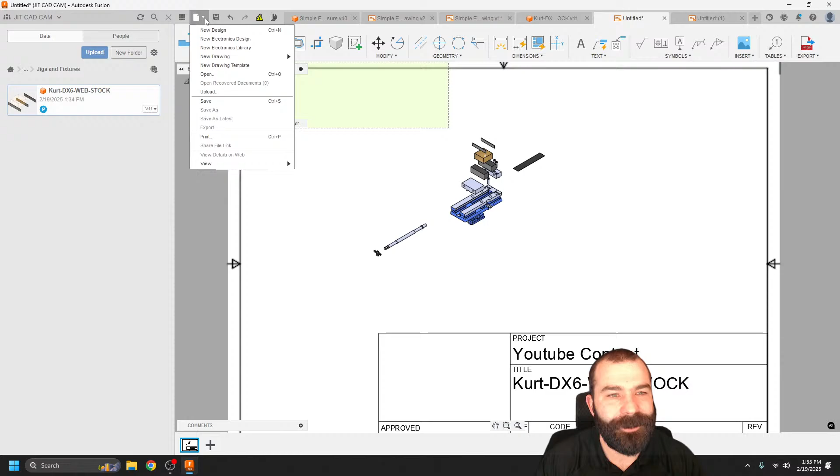So if you guys want, I'm going to go ahead and poke around here a little bit because I really feel like there is a way to insert an exploded view inside of here. I just can't remember it. So of course, we haven't talked about that. Maybe one of these days we'll talk about the other, but yeah, I just cannot remember. If anybody out there can remember how to insert an exploded view into this drawing, it's going to drive me mad. I think that's going to be my thing for the rest of the day.